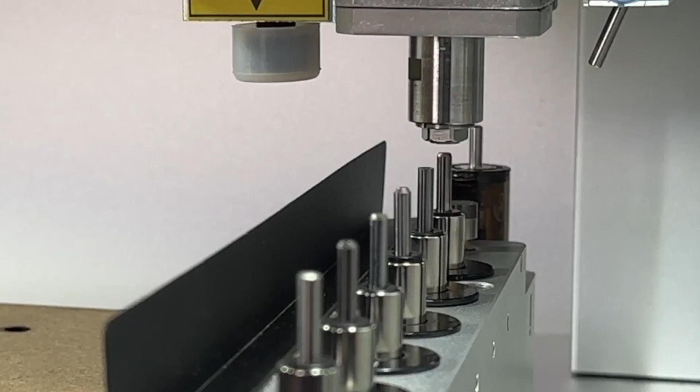Hi everyone, Jason from Makera here with another project tutorial, and in this one we're creating another fidget toy, but it's a metal fidget spinner using the Carvera and Makera CAM.

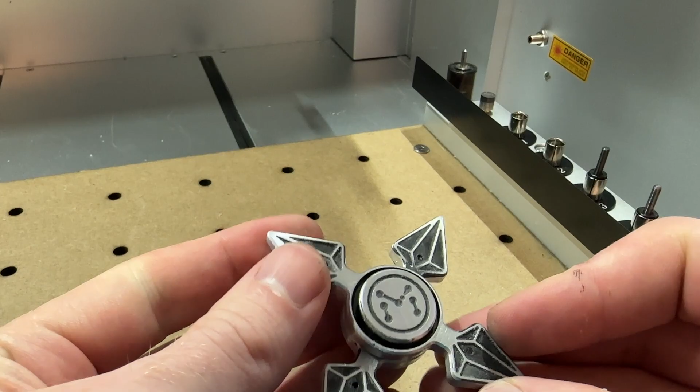In this tutorial, we look at how to make a classic fidget spinner, though with a multi-layer twist, which will involve some intricate toolpath design for a multi-sided metal project. You can choose to design your own CAD files for this project, or you can download the 2D CAD files that I'm using in this tutorial from the knowledge sharing page on our wiki site. You can also download the CAM files pre-prepared, but in this tutorial, we're going to walk through how to create this project in Makera CAM step by step.

So let's get started. All right, so after launching a new design file in Makera CAM, the first thing that we want to do is set our stock size. So we're going to hit the edit button and we want to select aluminum unless you've chosen to create the spinner using a different material, which is perfectly fine. And we're going to set our size to match our stock. In my case, it's going to be the 100 by 150 by 5 millimeter piece of aluminum that comes in the Fidget Toy Tool Kit that you can grab from our store.

Next, we need to import the design file for the top of our fidget spinner, which you can download from the knowledge sharing page. And we should see all parts of our design loaded right here on a new layer. Now, if we wanted to, we could reposition this file, but it should already be set based on this stock size with an appropriate margin all the way around.

With that, we can start by creating our first toolpath, which is going to be our pilot holes for our flip of our stock. So I'm going to hold Shift on my keyboard and select all 4 pilot holes here, then create a new vector drilling toolpath. We're going to drill from 0 millimeters to 7 millimeters. That should be enough of a margin to drill through the stock and also drill into our wasteboard so that we can insert our alignment pins.

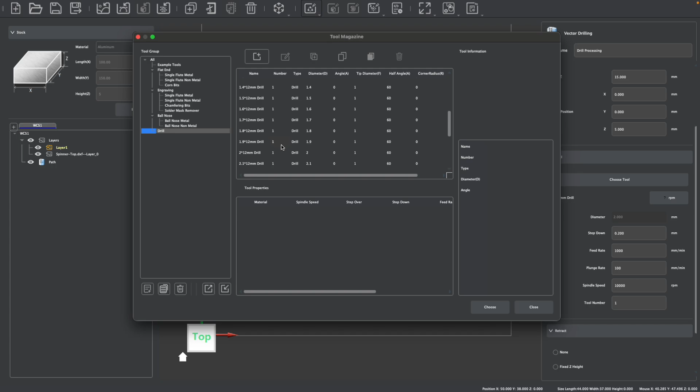And we want to select our tool. I'm going to go to my drill category and select a 2 by 12 millimeter drill bit. Aluminum should already be set as the parameters because we've set aluminum as our stock earlier, or whatever material you did choose to set. And we don't have to adjust any of the parameters. The default should be fine, but you might need to change your tool number if you're using the Carvera and you're using a different slot than what the default is. For example, I have this loaded in tool 4 on my machine.

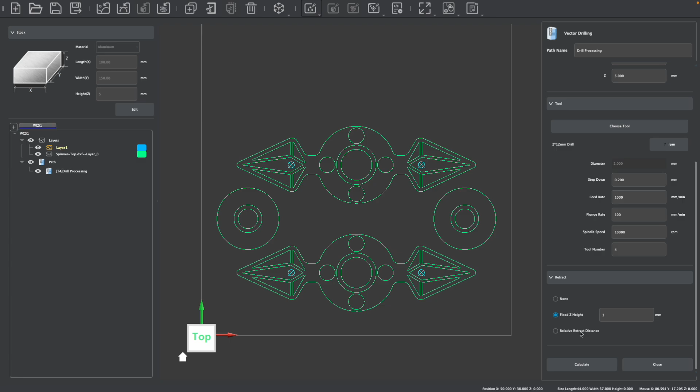Lastly, we do want to enable a retract. I'm going to do a fixed Z height of 1 millimeter, which means that it's going to do a peck drilling function, retracting as the process is completed to allow for proper chip evacuation. We can then hit calculate and we'll see both that the path was created and our little path icons for a drilling path.

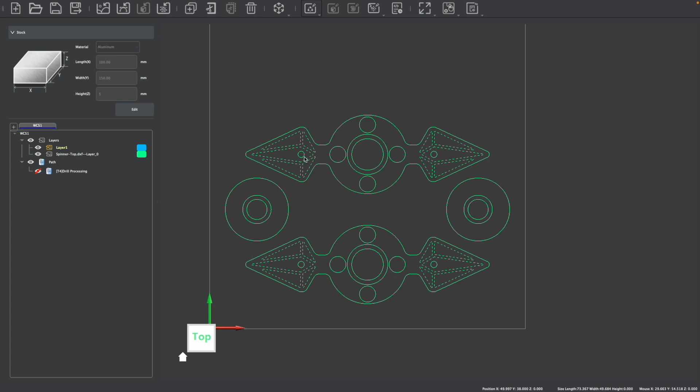Next, we're going to create a vector pocket for these intricate designs. I'm first going to select everything that I need, then go around while still holding Shift and deselect anything that I grabbed by mistake. So the only thing we need are our triangular designs here to engrave in this next toolpath. With those selected, we're going to go ahead and create a vector pocket toolpath. Our start is going to be from 0 and our end depth is going to be 0.3 millimeters.

You then may need to change your bit depending on what you're using. I'm going to use the 0.3 millimeter engraving bit from our toolkit and make sure again that aluminum is set as your parameter if that's the material that you're choosing. If you had another bit in this pocket toolpath previously, you may need to delete it so you only have one for this simple clearing path. The default parameters should be fine, but again, you might need to adjust your tool number depending on the order that you're using this bit, or if you have your tool loaded in a certain slot in your Carvera as I do, so I've set this to tool 3.

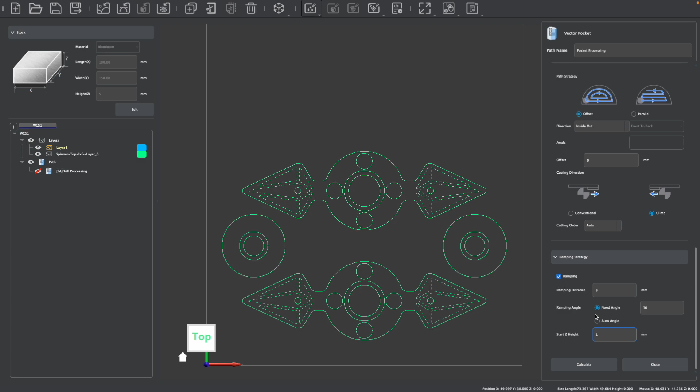Our default strategy settings should be fine, but we do want to make sure that we enable ramping. And for this, I'm going to enable a ramping distance of just 5 millimeters with an angle of 10 degrees and a start height of 1 millimeter, which should give us a nice clean cut while also protecting the end of our bit. We can then hit calculate and see the toolpath generated.

I'm going to hide this pocket process, and next we're going to create the pockets for the magnets and the bearing. So I'm going to hold Shift on my keyboard and select all 8 magnet holes like so. And then I'm also going to select the 2 bearing holes, which are these 2 outer holes here, like that. We can then go ahead and create a new vector pocket toolpath.

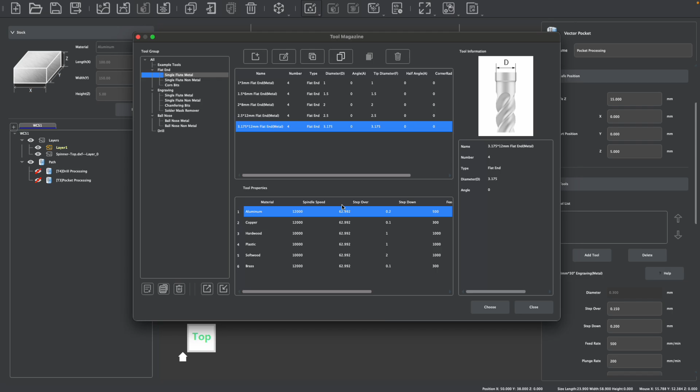And we're going to start from 0 and end at 2.2 millimeters for the height of these components that we're working with. We want to change our bit from the engraving bit, so I'm going to delete that. And instead, I'm going to add from my single flute metal category a 3.175 by 12 millimeter flat end mill with aluminum set as my parameters. The default parameters should be perfectly fine, but you may need to adjust your tool number again. I'm going to change this to tool 1 based on where I have this loaded in my Carvera.

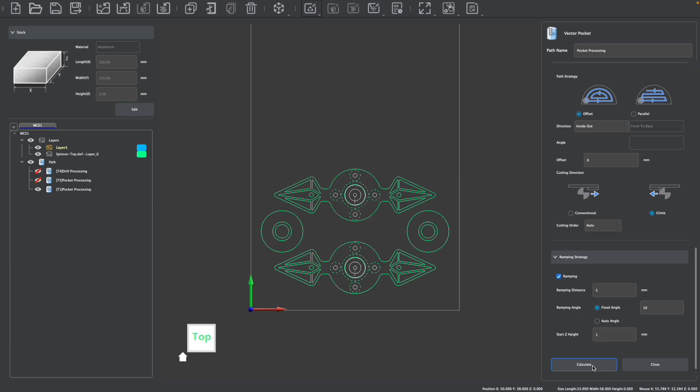And we also want to again enable ramping. I'm going to use the same parameters as before, so 5 millimeters with a 10-degree fixed angle and a start height of 1 millimeter. We can then calculate these toolpaths, and we will now have our pockets created for these crucial components.

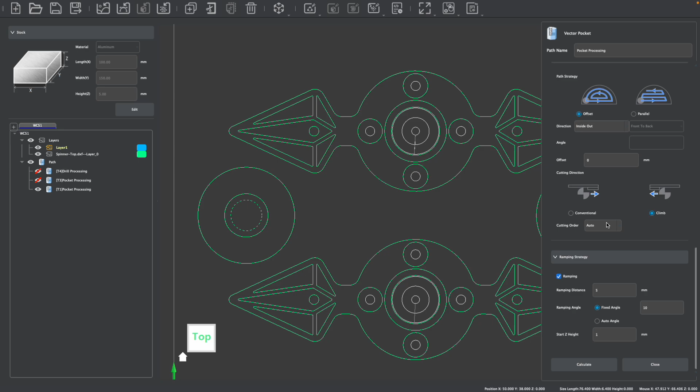Next, we're going to create a pocket for our post that's going to hold our spinners together, and that's going to be in these two end cap holes. So I'm going to select the two inner holes here and create a new vector pocket toolpath. For this, we're going to start from 0 millimeters and end at 3 millimeters. We're going to use the same 3.175 by 12 millimeter end mill, and we're going to use the same parameters, so none of these settings should have to be adjusted. Likewise, the ramping strategy also will remain the same, so you can simply calculate this toolpath to create it.

While we're still working on our two end caps here, now we're going to machine material away, which will reduce the overall height of these end caps, giving us a nice flat piece, while also making a post around the hole that we just created in the center. So to do this, we're going to select the outer circles on both sides and the larger circle from within, like so. We can then create a pocket toolpath and set our end depth to be a little bit more, so 3.5 millimeters, so we get a nice overall thickness at the end, as well as create a nice post that goes around the center hole that we've created. But we're going to keep all the other settings exactly the same.

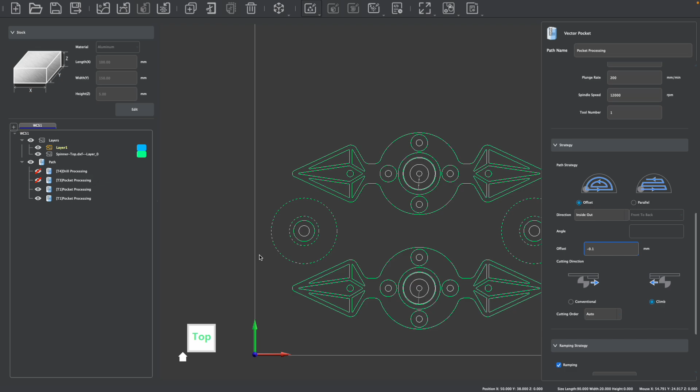In your strategy, we want to create an offset strategy with inside out as before, but this time we're actually going to also offset the cut negative 0.1 millimeters, so that way we have a nice post here as we go ahead and create this cut. As with before, we can enable ramping just to keep the wear on our bits low, and we can calculate this toolpath.

Next, we're going to cut the outer perimeters of all of the different shapes, but we're not going to do this to cut all the way through. We'll do that after we flip our stock over. Instead, we're just going to cut the perimeter, which will do most of the machining and allow us to create a chamfer while still on this side of the stock. To do this, I'm going to select all 4 outlines around all 4 different parts, like so.

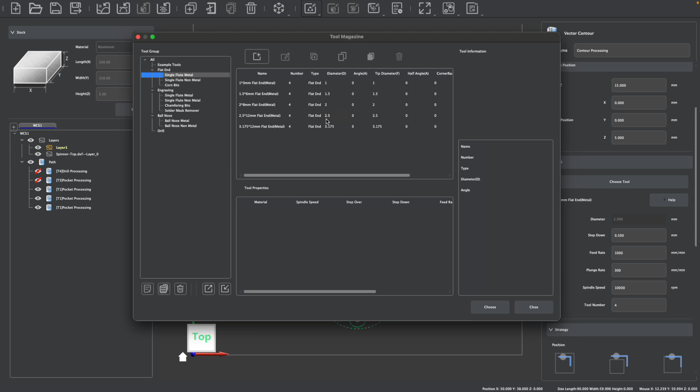We can then create a contour toolpath, and our start depth will be 0, and our end depth will be 4 millimeters, which means that there's only 1 millimeter remaining between this bottom of the stock and these parts, and we need to keep that in mind for later when we flip our stock over. For our tool, we're going to select our single flute 3.175 by 12 millimeter flat end mill for metal with aluminum set as the parameters. You shouldn't have to change the parameters at all, but you may need to change the number of this tool if you reassigned it earlier.

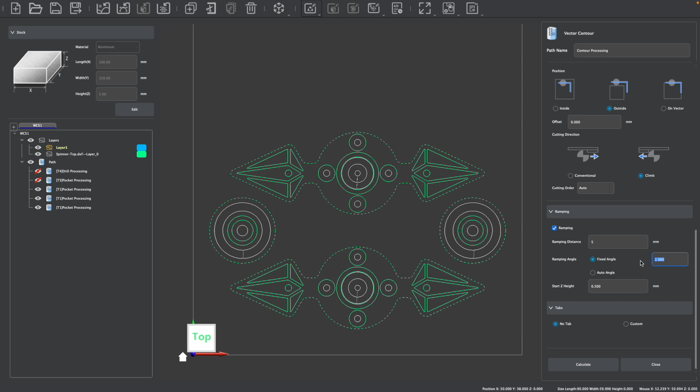Next, we don't have to change anything in our strategy. We're going to cut on the outside as per the defaults. We are going to enable ramping again, but we might need to reset our distance to match what we did earlier with a distance of 5, an angle of 10, and a start height of 1. And we're not going to need any tabs as this isn't going to cut all the way through. We can then hit calculate to see our outer outlines profiled.

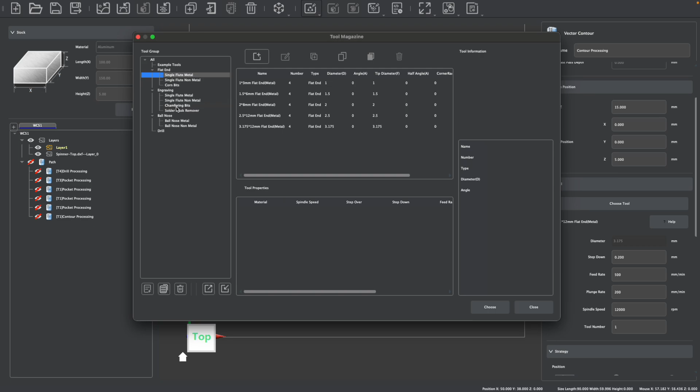And the last toolpath we need for this cut, and I'm just going to hide all of our other paths, is a chamfering path. Now the chamfering path is going to follow the same lines that we just used before. So I'm going to select my 4 outlines again, and it's also going to be another contour toolpath. This time, however, our end depth is only going to be 1 millimeter. We're going to change our tool to be our chamfering bit for metal, and I'll be using a 0.1 millimeter by 90 degree chamfering bit, which is included in the toolkit, as well as an aluminum preset for this.

And we are going to adjust the default parameters. I'm going to change my step down to be 1 millimeter, which means that there's only going to be a single pass, which will give us a nice clean cut. But to do this, I'm also going to drop my feed rate to 100, my plunge rate to 100, and if I need to, change my tool number, which in this case I do not. We're going to use outside as a path strategy, and we need to offset the chamfering bit negative 0.5 millimeters, which is what controls the size of our chamfer.

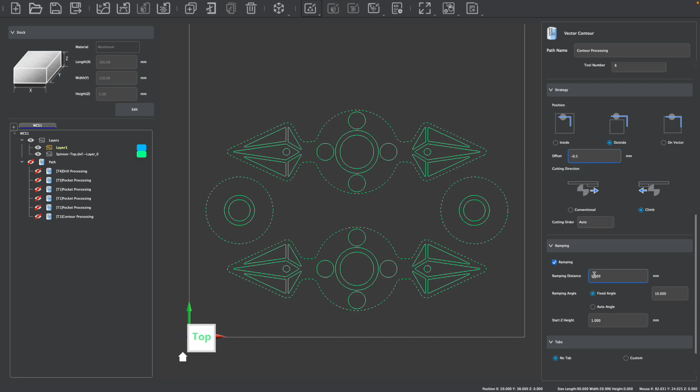Ramping is incredibly important as we're doing this in a single pass. So I'm again going to enable a ramping distance of 5, an angle of 10, and a Z height of 1. And no tabs will be needed as we're not cutting all the way through. Now all toolpaths are finished for this side of our stock, so we can enable our toolpaths to preview what things look like, and that looks pretty good. Now is a good time to press save if you have not already done so. And we can move on to preparing the bottom of our design.

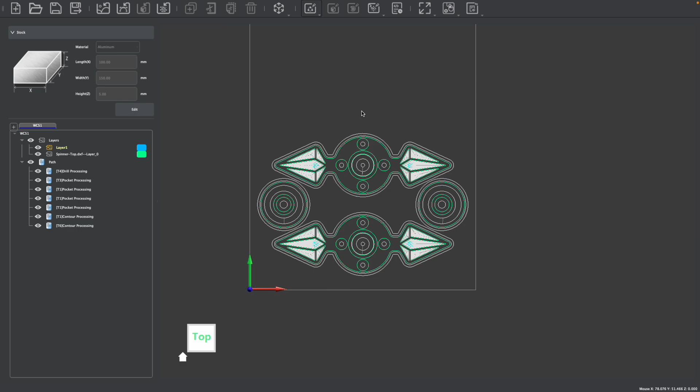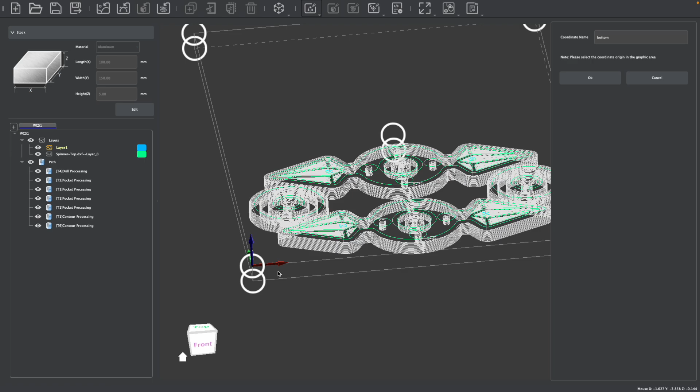To prepare the bottom, we have to create a new work coordinate system, so that way we'll be able to flip our stock over. So to do this, I'm going to press the plus button to enable a new work coordinate system, and I'm going to rename this coordinate system to be bottom. And then we have to select the origin point for what the bottom will be. Now you'll see that the default origin point is in the top left corner. So what we need to do is select where the top left corner will be when we flip our stock over. So if I rotate my stock in a sort of horizontal fashion here, you can see that this corner will be the top left. So I'm going to choose that as my work coordinate system for the bottom.

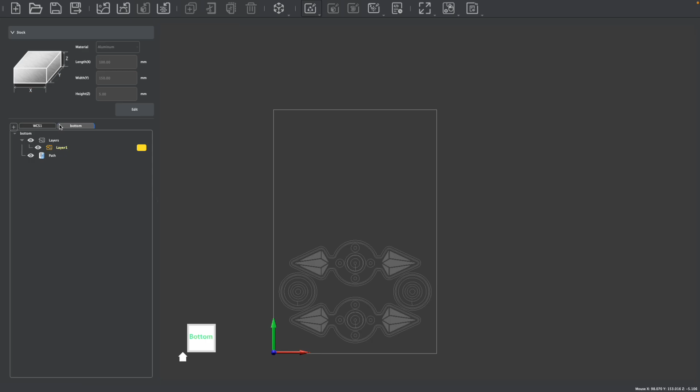Once set, we can press OK, and you'll see that we now have this new tab in our layers panel, where you can flip back and forth between the top and the bottom. And when you're on the bottom, you see a preview of your graphics from the top. I'm going to hide the toolpaths on the top, so that way all we see from the bottom is our design file. With that set, we can then import the 2D design for the bottom of our spinner. Now, as these design files were made together, they should automatically align like so. But if needed, you can use the center to center feature to align these designs.

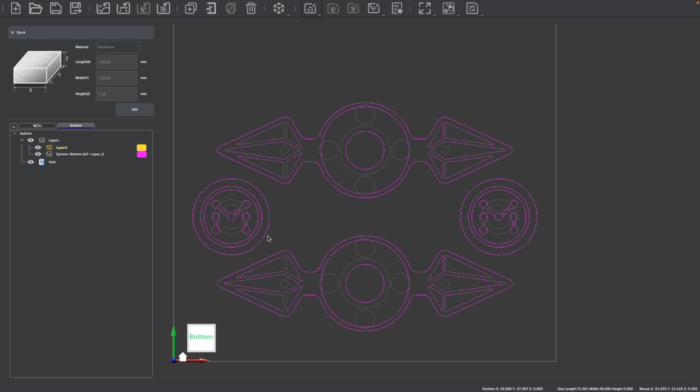It's also important that any offsets are set uniformly in CAM and not done later, as we'll discuss when we go to configure our jobs. This is so that way the design files will align when the stock is flipped based on our alignment holes that we've drilled on the top of our design. Now, the first toolpath that we need to create for the bottom is going to be our engraving path that engraves all the different design features on this side of the spinner. So to do that, I'm going to select all the triangles in my design, as well as select the logo on our two end caps. With these parts of our design selected, we can create a vector pocket toolpath.

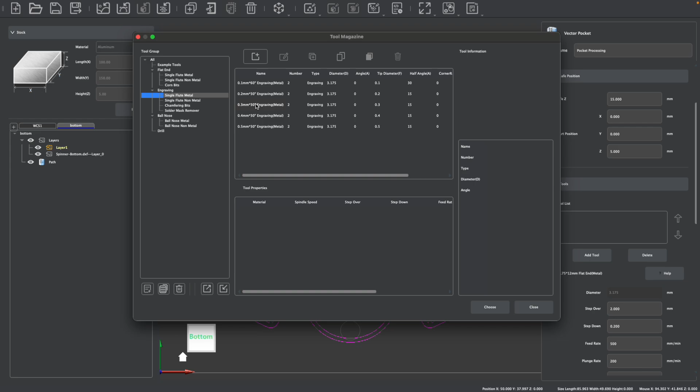We're going to engrave from 0 to 0.4 millimeters. And we need to select our engraving bit to do this. So I'm going to delete my flat end mill that I have already preloaded, and I'm going to head over to the engraving bits for metal and select the 0.3 millimeter by 20 degree engraving bit with aluminum set as our default parameters as we did earlier on.

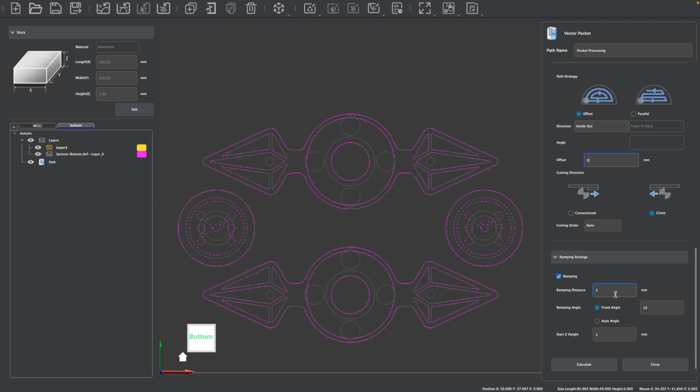We don't need to adjust any of the default parameters, but you might need to change your tool number. I'm going to use the same tool numbers that I used for the top, so I don't need to reload my tool changer for the bottom design file. We don't need any offset for this, so if you have an offset enabled, make sure that that's removed. That might have been from the path that we created earlier on. And we are going to again use ramping using the same 5 millimeter distance, 10 degree angle, and start height of 1. We can then press calculate to preview this toolpath.

The next thing that we have to do is create the hole in the center, which is where our center rod is going to pass through. So I'm going to select these two center circles in our design, like so, and then create a vector pocket toolpath. Our start depth is going to be 0, and our end depth is going to be 3.5 millimeters, so that way we pass all the way through.

We're then going to select our 3.175 by 12 millimeter flat end mill that we used earlier on, and we don't need to change any of the default parameters, but you might need to adjust your tool number to make sure that you match what you did on the top side of your stock. We're going to use the same strategy and ramping that we did earlier on, so you can simply press calculate to calculate this toolpath.

Next, we're going to create some larger pockets, which is where we're actually going to be able to hold our fidget spinner from. So I'm going to select these two larger circles and create another vector pocket toolpath. We had to do this separately because we're going to use a different end depth. This one's going to start from 0 millimeters but end at 1.5 millimeters. However, all the other settings should remain the same.

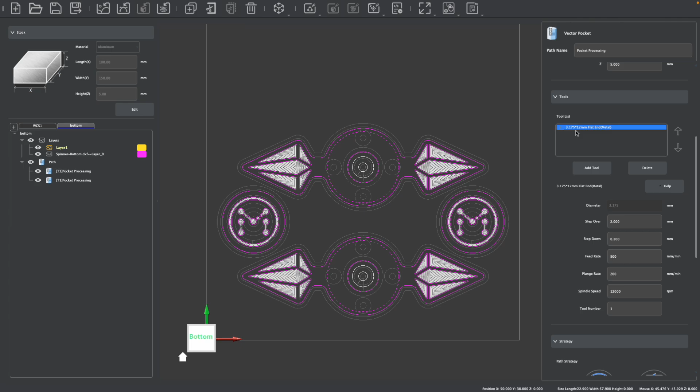So 3.175 by 12 bit with our aluminum parameters and the same tool number. We're going to use the same strategy, and we're going to use the same ramping technique. After pressing calculate, we can see our toolpath is generated. Now, the last toolpath that we're going to do is going to actually cut the parts out of our stock. And we're going to do this in a slightly clever way in that we're going to create both a chamfer and cut the parts out all at the same time.

To do this, go ahead and select your outlines for all 4 parts. Then create a vector contour toolpath. Our start depth is going to be 0, and our end depth is going to be just 1 millimeter. If you remember, we cut all the parts out from the top to a depth of 4 millimeters, meaning that there's only 1 millimeter remaining for our 5 millimeter stock.

For our bits, we are going to use our chamfering bit. This is going to machine both the chamfer and cut through our stock to release the parts. You can't typically use a chamfer for a full contour cut, but because we're only machining a millimeter of material away, we can get away with this and create a multi-versatile toolpath.

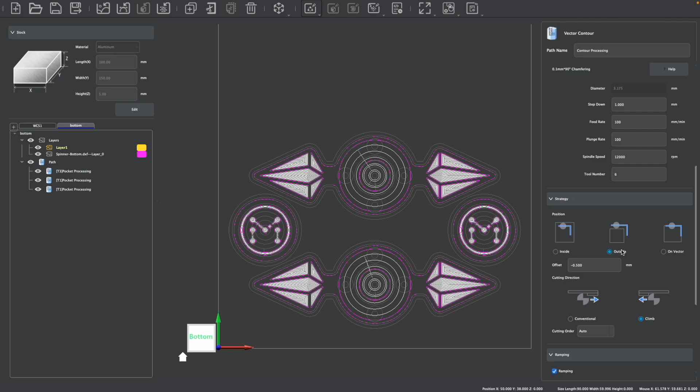We're going to use the same parameters as we did earlier with a step down of 1 millimeter and slower feed and plunge rates, as well as make sure that our spindle speed and our tool number matches what we did earlier. Likewise, we're going to offset negative 0.5 millimeters from the outside of our path, and make sure that ramping is enabled.

Now you could use tabs, although that wouldn't give you the cleanest finish using the chamfering bit. Instead, I'm going to use double-sided tape to secure my parts, as I'll show you later on. So we can just press calculate to calculate this toolpath. With that done, let's head back over to the top and enable our paths, and then we should be able to preview everything in our design here.

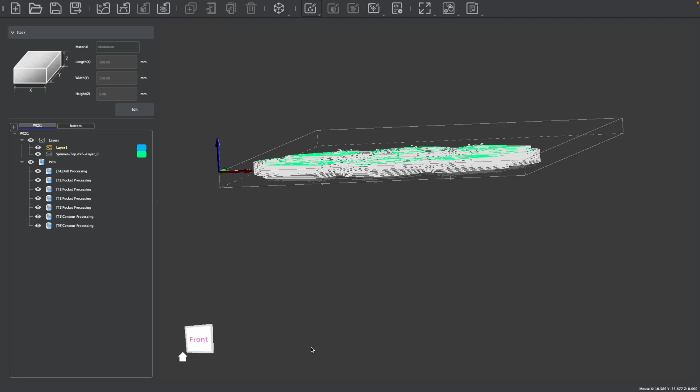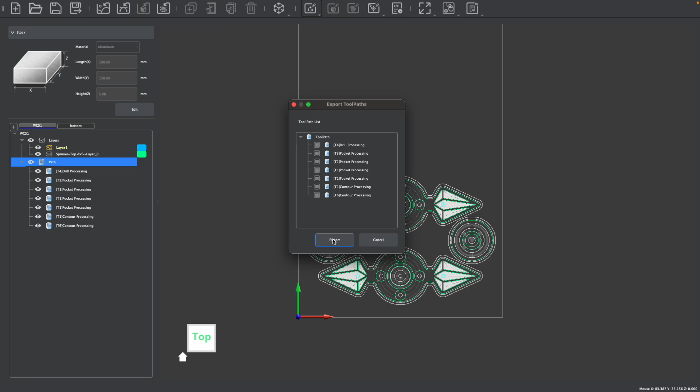We're now ready to export our toolpaths, and we're going to have to do this separately for both the top and the bottom. So from our top coordinate system, I'm going to right-click Path and Save All Toolpaths, and export that as a G-code file to my computer. Then I'm going to switch to the bottom, right-click Path, click Save All Toolpaths, and export these as a G-code file to my computer.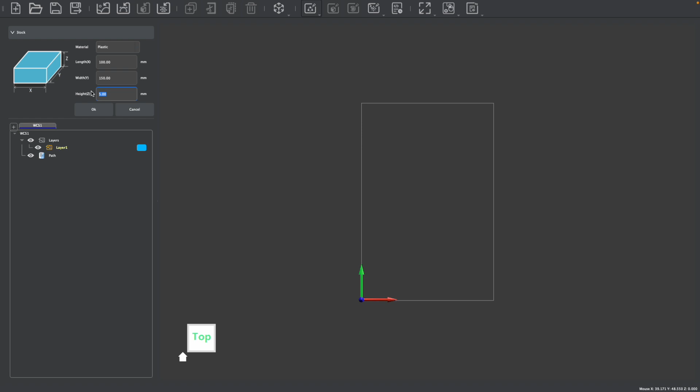Now before we head back to the machine, we do have to create one more part, and we're going to do this using a different material. So I'm going to create a new design file in Makera CAM, and I'm going to create a post that passes through the fidget spinner using a thicker piece of acrylic stock. So to do this, I'm going to edit my material, and I'm going to select plastic. I'm going to use a piece of material that's 100 by 150 by 10 millimeters from the Fidget Spinner Toolkit.

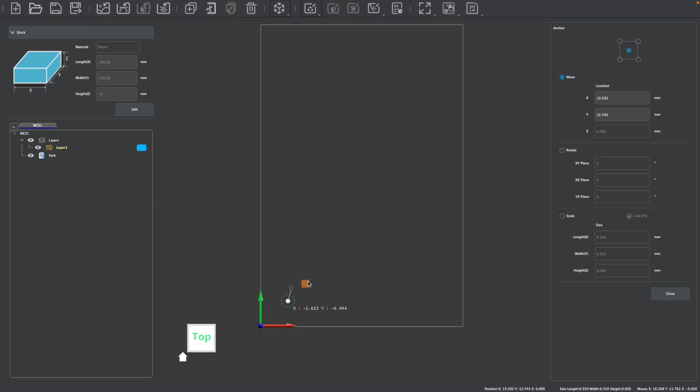Now there's no design file on our wiki sharing site to do this because all we need to do is create a simple circle. So using our create tools, I'm going to create a circle with a diameter of 6.35 millimeters somewhere on my stock. If needed, I can use the transform tools to reposition this so that it's in a nice place without using too much material while also giving enough margin for clamps and fixtures.

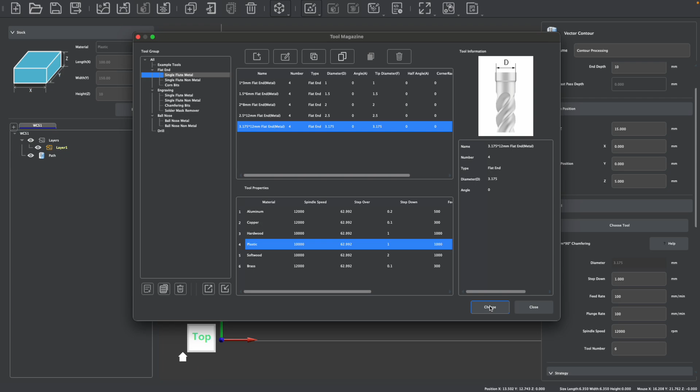We're then going to create a very simple vector contour toolpath with a starting depth of 0, an end depth of 10 millimeters, and using our same single flute metal 3.175 by 12 millimeter bit with our plastic parameters set. I'm going to change the tool number to match what I had earlier so I don't need to move my tools around for the two different jobs.

Our strategy is going to run along the outside, and you shouldn't need any offset. Ramping is not required, but it's not a bad idea to leave it enabled. Ramping, of course, will just reduce the overall wear on your bits, though a metal bit like this should be able to cut plastic without any issues.

Now, I'm not going to use tabs. We are cutting all the way through, but what I'm going to do is leave the plastic on my acrylic when I machine it, so that way it should stay in place and I can just break it away. Alternatively, you could use a double-sided piece of tape to hold your material in place so that you won't have to cut any tabs away for a nice clean finish.

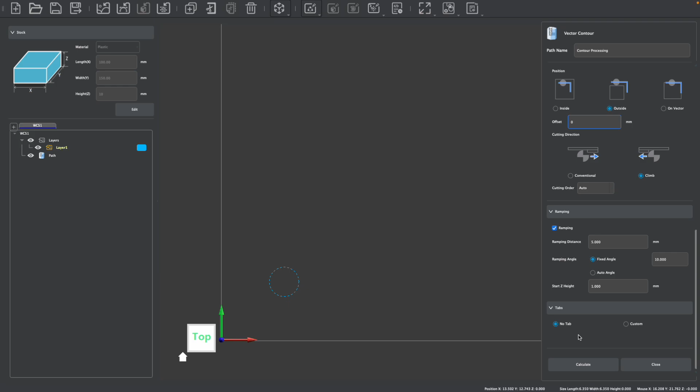After pressing calculate, we can see that we have our toolpaths for our post, so we can simply right-click our path, save this path, and export it as a G-code file to use later on. So with our G-code files prepared, it's now time to prepare our machine for manufacturing.

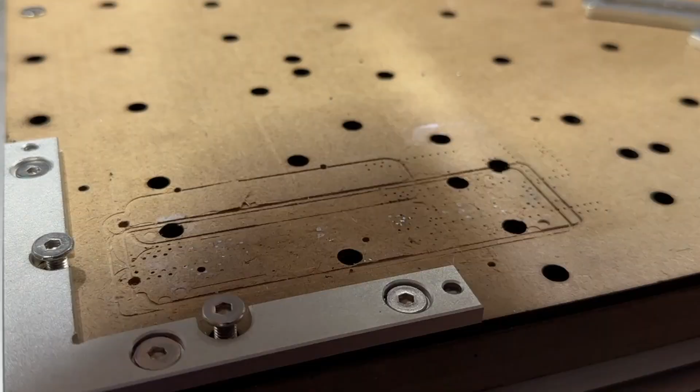We can secure the stock to the bed of our CNC and make sure that you have a piece of wasteboard, as we'll be machining all the way through our stock for the alignment holes and to cut the parts out later on. While I'm using a softer piece of MDF in this video, you may find that a harder piece of material for your wasteboard works better when using alignment pins.

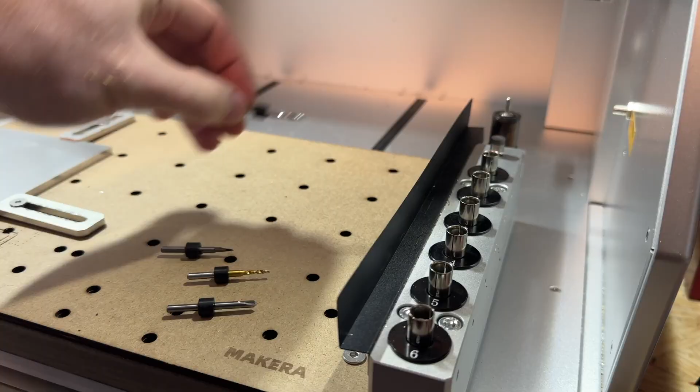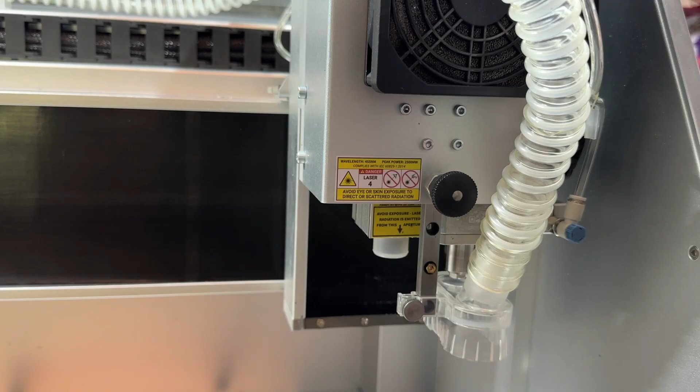And if we're using the Carvera, we need to make sure that our bits are loaded in the automatic tool changer in the order that corresponds to our CAM file. In this case, our 3.175 by 12 millimeter end mill would be in slot 1, our 0.3 millimeter engraving bit would be in slot 3, our 2 millimeter drill bit would be in slot 4, and our chamfering bit would be in slot 6. We also typically don't use the dust tube for metal and instead use the air assist module for chip evacuation and cooling, though this isn't always required.

Now with our machine set up, we can head over to the Carvera controller app to configure our G-code files for manufacturing. After loading the G-code file for the top of the spinner, we can press the config and run button to configure this job. We shouldn't need to adjust the offsets, and with a two-sided project, these offsets should be set in the CAM process earlier on to make sure that both sides of your design align perfectly.

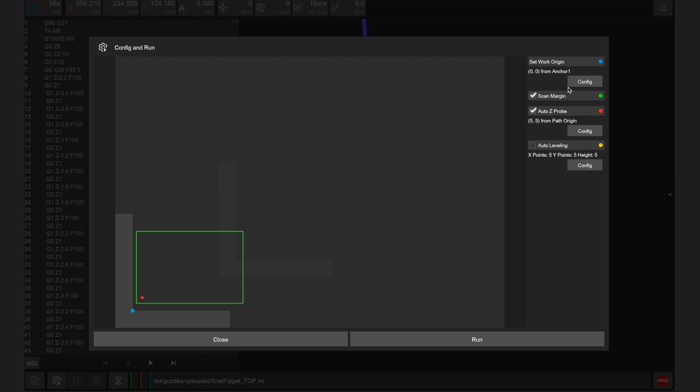We do want to enable scan margin. This traces the perimeter of our part before machining, which lets us make sure we're not going to collide with any clamps. Auto Z-probe should be enabled to check the height of our stock automatically, and we can use auto leveling to compensate for any deviations in stock thickness by probing the surface of the stock and adjusting during the manufacturing process based on the points recorded.

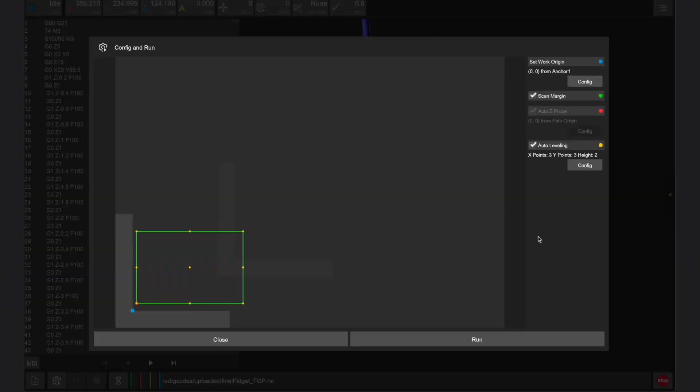Once set, we can press run. After scanning the perimeter and probing the surface, the Carvera will select the first tool automatically, while the Carvera Air will prompt you for the first tool change.

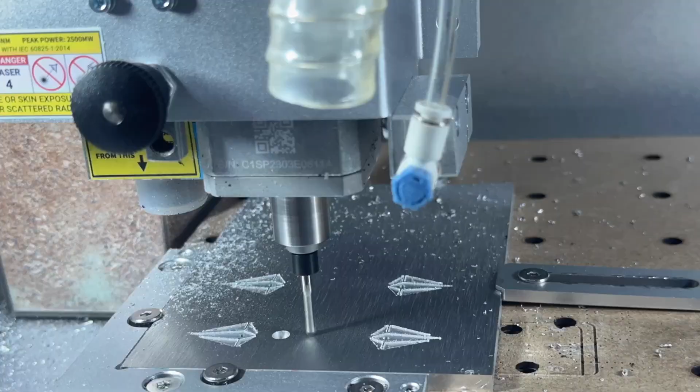The first tool path will be drilling the alignment holes before moving on to the engraving path for the surface designs. The larger pockets will then be machined using the 3.175 by 12 millimeter end mill before running the outline of the parts without passing all the way through the stock. Lastly, the chamfering bit will be used to chamfer the edges of each part.

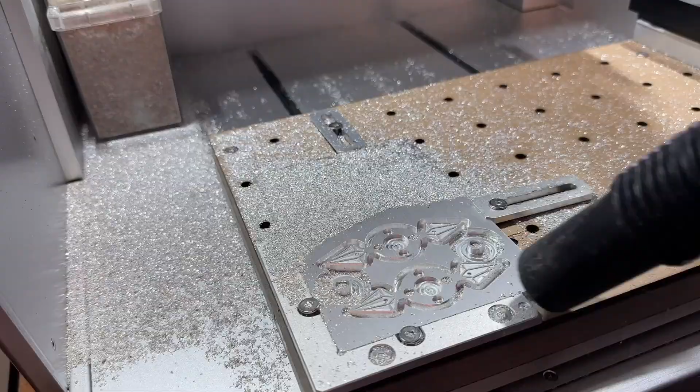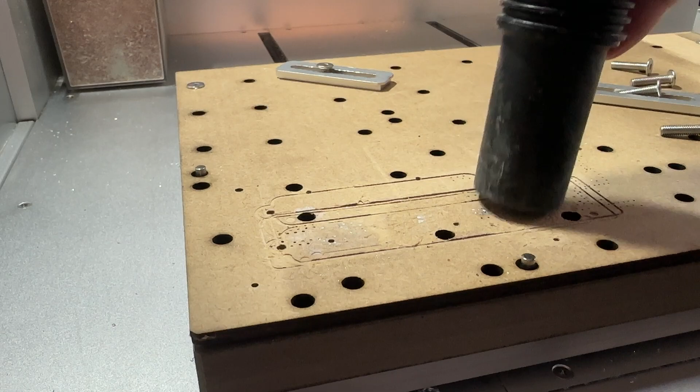Once the top is finished, we can vacuum away any excess chips, then remove the stock. It's sometimes helpful to remove the corner bracket so alignment with the pins is easier to do. You may also need to vacuum out the pinholes in your wasteboard once the stock has been removed.

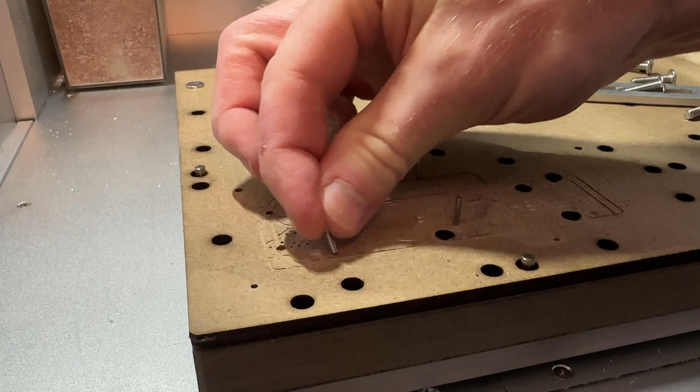We also need to apply double-sided tape to the top side to hold the parts in place if you didn't enable tabs. After the 4 pins are inserted in your wasteboard, you can flip the stock horizontally and place it over the pins. You won't need the bracket for the bottom side, as the 4 pins will square our part up based on the design.

You can then add screws and clamps to each side of the stock to hold it in place securely before removing your alignment pins. And with the material secure, you can then head back over to the Carvera controller app to prepare your bottom files.

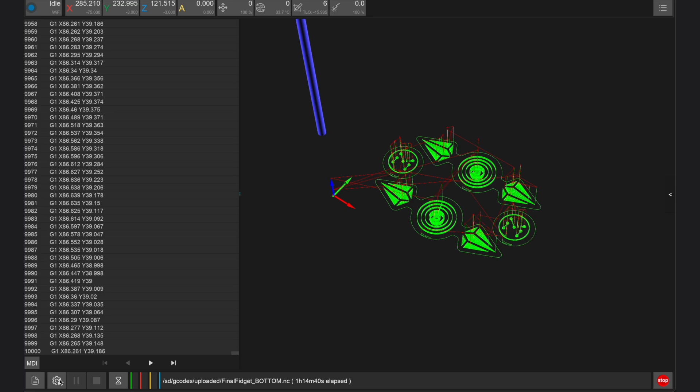After loading the G-code files for the bottom part, we can open the config and run window to prepare it for manufacturing. As with the top, we don't want to adjust the offsets, but we do want to enable scan margin, auto Z probe, and auto leveling. Once set, we can click run to start manufacturing.

The Carvera will again trace the perimeter and probe the surface of our stock before moving on to the toolpath to manufacture the bottom of our design. This includes the engraving, the smaller pockets, and the larger pockets. Lastly, the chamfering bit will not only be used to apply a chamfer, but also to cut through the stock to release the parts gently.

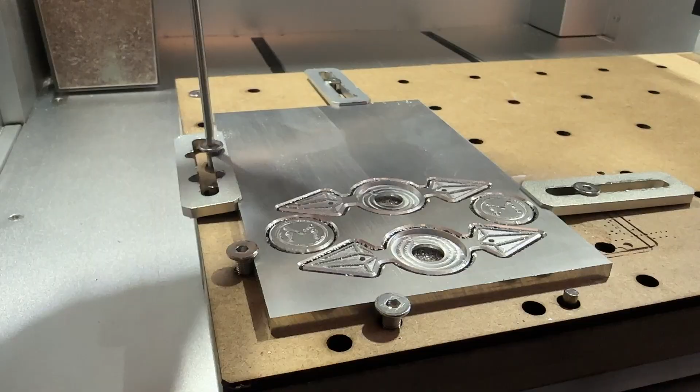Once finished, we can vacuum away the chips and dust and remove the clamps to peel the stock and parts off the bed of the machine. Be careful, as there may be some chips and sharp burrs attached to the double-sided tape, which can be peeled away from the bottom of the parts.

After checking the fit, you can sand the edges to remove any burrs and clean up any unfinished surfaces. And while it's not required, you may also want to add some paint to the pockets and then sand the surface to give you a nice 2-color design with a brushed metal appearance.

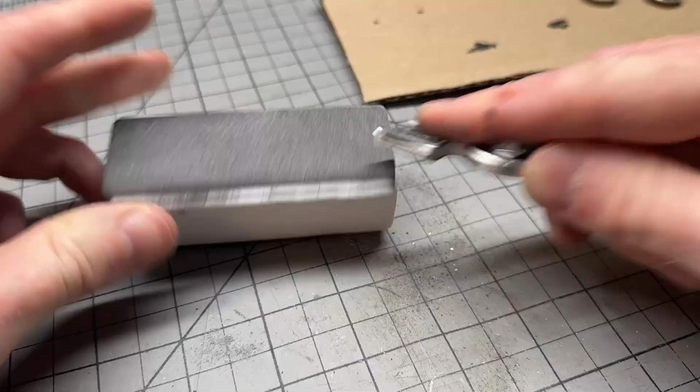But before we assemble the spinner, we need to manufacture the acrylic rod using the G-code file that we prepared earlier, by following the same steps to secure the stock and configure the job as we did with the 2 spinner files earlier on.

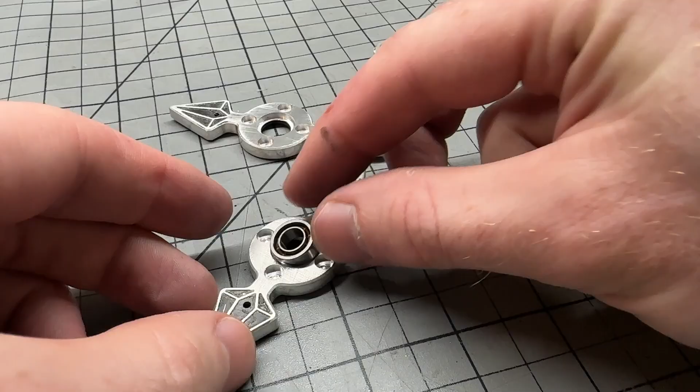Now to make this spinner work, we need to install the magnets and the bearings into our 2 parts before we can finish assembly. You should be able to press the bearing in, as well as the magnets in place, while ensuring they're facing the correct way so that the sides will lock together rather than repel. The magnets will press in, but aligning the spinner may be a little difficult if you don't add a small amount of super glue to keep them in place.

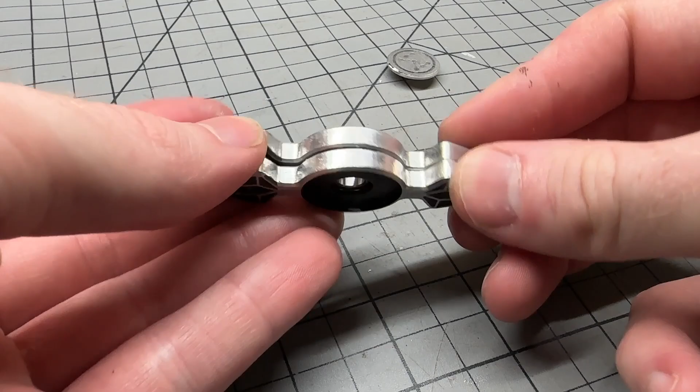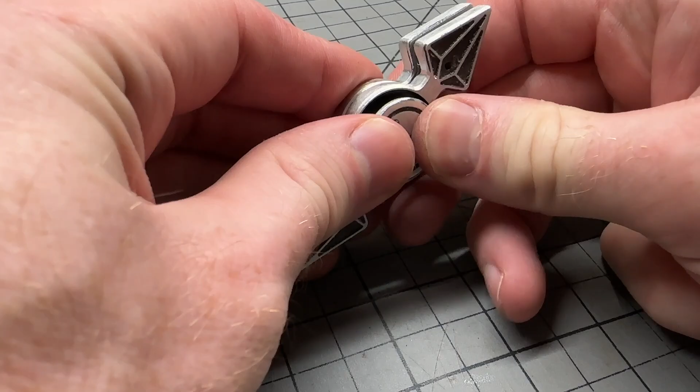After installing the magnets in the bearing, you can then place the 2 halves of the spinner together, then slide one of the end caps through the bearing with the acrylic rod pre-installed. Then you just need to attach the second end cap to the other side to finish assembly. And there you have it.

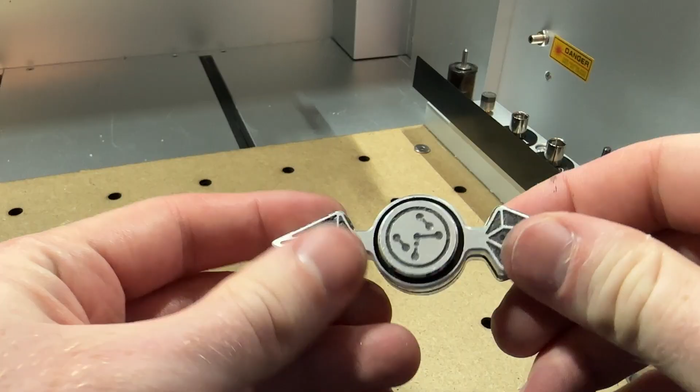There's, of course, many different ways to create a fidget toy, and many of the techniques and processes shown in this tutorial are universally applicable. For example, the same steps that we followed in this tutorial could have also been used to make a simpler single-layer fidget spinner instead.